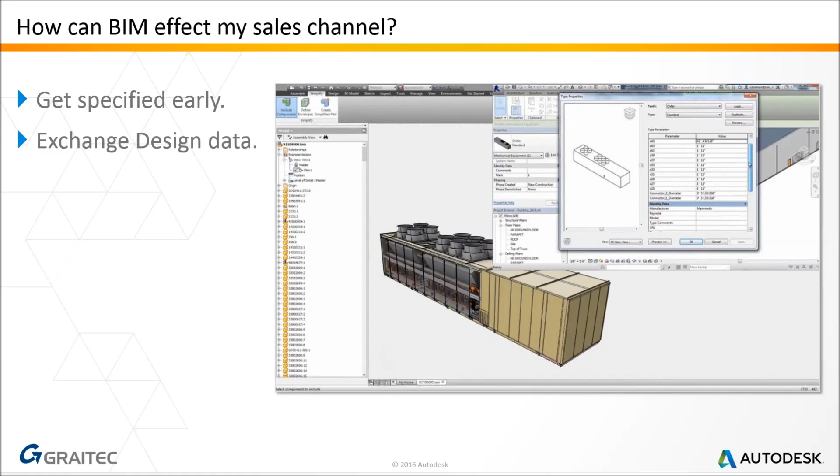Maybe we're using a mechanical CAD system, in this case I've shown a screenshot of Inventor, and we want to include our stuff. We want to be able to produce a model that can be consumed in the BIM. So this is another stage where we could get involved by essentially doing a data drop of our design at any given point. I think we would probably still deliver drawings with this, because drawings are still our contract documents currently, but we're producing some data-rich 3D model that can be shared, used for coordination, used for clash detection, and used downstream to start scheduling out information. So that's one other touch point where we can get involved in BIM.

The next one is for those people who sit somewhere in between. So maybe you do have a product, but maybe you offer some bespoking. Maybe you offer a design but in a couple of different colors, or maybe there's a couple of different configurations that you can offer your customer.

So this, I've got a screenshot here of a solution called Autodesk Configurator 360, and what this allows us to do is take an Inventor model that we've built as a configurator. Maybe we'd use some iParts and iAssemblies, maybe we'd use some iLogic, and all that stuff can be bundled up, wrapped up, and pushed up into the cloud to Autodesk Configurator 360, and this can be embedded in your own website. It can even be your own branding, so you don't have to see the Autodesk branding.

But then your customer can come along, and I'll indicate with my mouse here, they have a little control they can click on. They can click on this control and use the configurator you've built in, going through to pick and choose all the different options they could have. And then when they're done, they can either click on a button to go to a quote from you, so they email you directly and you get a list saying with this configuration, how much would it cost? Or they can download a file, and you get to choose which file formats are available.

In this case I've indicated a Revit family file and an IFC file, which we'll talk about later. But they can download a file if you would let them. You could also give this to your sales team as a tool, so they can walk the customer through the configurations, and then when they're done they can produce a quote. So this is really for more complex items where you couldn't build all that intelligence into one CAD file, and you want to offer your customer some choice.

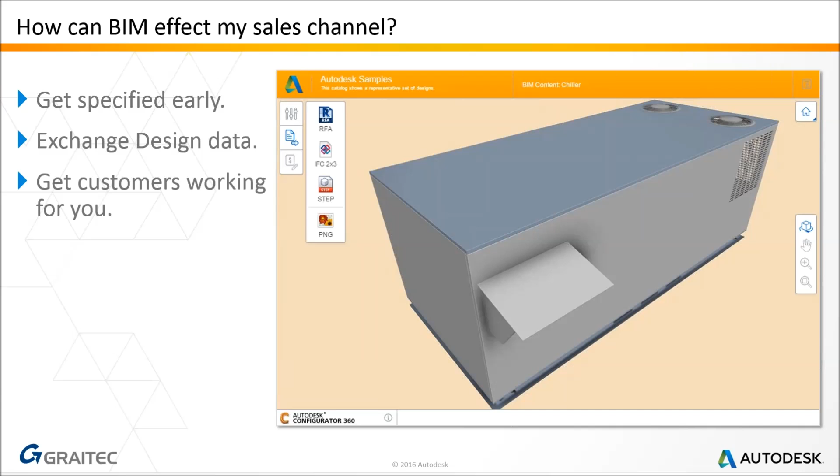Okay, so there's 3 different touch points where you could get involved in BIM. The last one was actually a bit of a surprise to me until I started going out there and talking to customers, but this is in the final stages. Many customers are now saying that they would like to have the BIM and use that as the beginning of their facilities management service.

So really what we're seeing here is perhaps us moving away from an O&M, which is fantastic because nobody likes producing operations and maintenance manuals. We quite often leave it to the last minute and print off a whole ton of drawings, box them up and put them in a big van, and we know they all go down into the basement and nobody ever uses them. So by having the BIM, the building information model, the customer has a big old database of the 3D model they can then analyse and use at the beginning of their facilities management.

Now for some companies, the maintenance contracts, being in touch with the customer—so if the customer wants something repaired or replaced or maintained—is a really important part of their business. And in fact some companies would rather have that business than the original supply.

They're willing to supply at cost if they can get the maintenance contract. So by the customer having access to your details directly, it means they can find you, and they can come back to you and ask questions. We can also provide a data link to that O&M, so the customer can link through with a hyperlink. They can come back to your website and look for a PDF, which could give them the cost data or maintenance information, whatever you need them to have. So instead of us having to supply loads of stuff on paper or spend time compiling PDFs, we can keep that link live and keep that information directly with them.

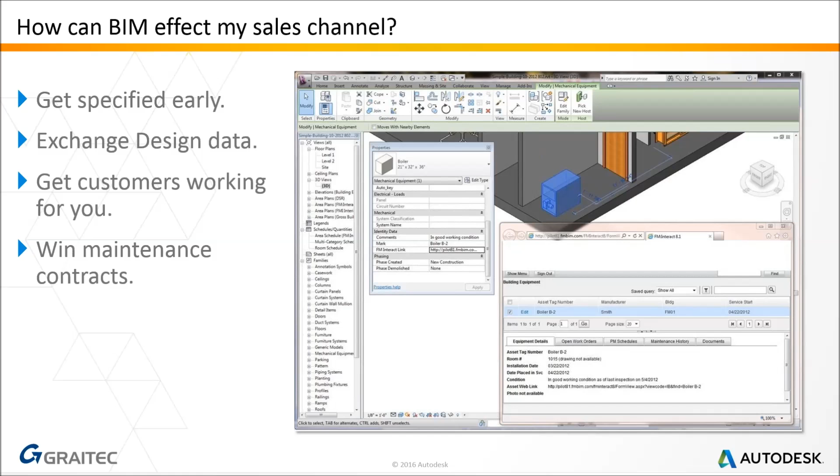So I hope you'll see yourself in one of those four categories, or maybe a couple of them. I wanted to throw that in right at the beginning - why is it useful, how can it affect my sales channel. But let's take a step back now and ask what exactly is BIM.

We've been doing something very similar to this in manufacturing for a long time. We've been taking a 3D model and using it to provide a database of information about our product - using it to compile a bill of materials, and the bill of materials is our data. In construction, this idea has now been called building information modeling, and it's really exactly the same idea: taking a 3D model and using it as a database of information about our building project.

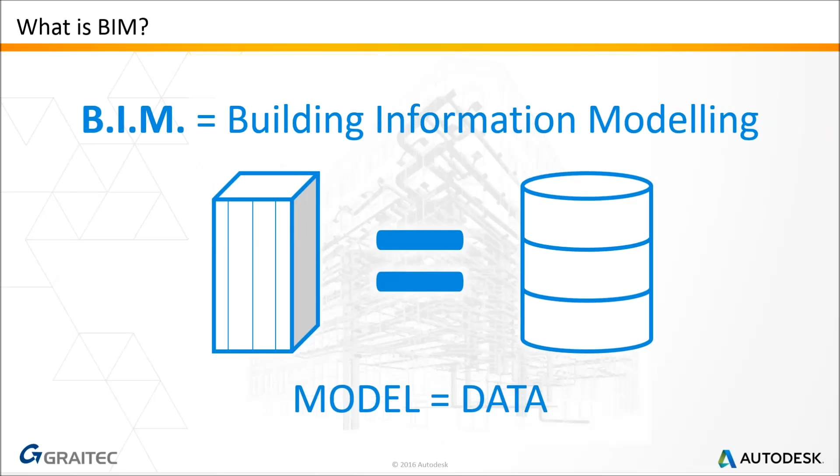Now there's one key difference between BIM and manufacturing - it's one of my favourite quotes. Let me just see if I can get this right: manufacturing is designing one part and making a million of them, whereas construction is designing one building comprised of a million parts. So although we've got a similar idea of creating this 3D database of information, there are some fundamental differences to the way you would design and specify a building versus the way you design and specify something in mechanical design.

In manufacturing, the efficiency has got more and more efficient over the years, because customers have had a market where they can come and say, listen, if you don't give me this product a bit cheaper, I'm going to go to your competitor. So there's this real incentive in manufacturing to become lean, to get into this black belt and Six Sigma and all this kind of stuff, where we can try and produce the same product for less money in order to retain our profit margin. There's been a huge drive since the Second World War in manufacturing to try and become more efficient, try and become leaner.

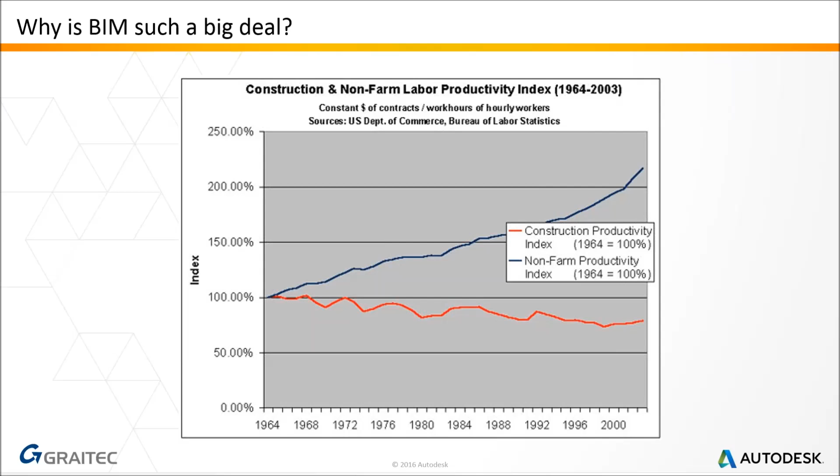So if construction is becoming less productive, costing the customer more, what do we do about that? Well, the biggest customer in the UK is the British government, and they were looking at their own construction projects. They recognized that construction project costs were going up, and asked what can we do about that. They put together a report with a company called McGraw-Hill, and one of the key findings we're going to talk about was the use of BIM.

This government report identified there was a 20% reduction in waste due to the use of BIM. Now 20% is huge, and I just want to clarify, this isn't a reduction in waste as in bin bags full of rubbish on site - this is waste as in a waste of time. So it's a 20% increase in productivity, if you like, a reduction in wasted effort.

So the wasted effort came from things like decision making. With BIM, working in 3D, you have to make those decisions early. You can't fudge things like you do in 2D and think, well, I'll work it out later. You've really got to make those decisions, and in business, pulling decisions forward usually makes sense. Even if later we think perhaps that was the wrong decision, making a decision is usually better than sitting and waiting. Because the longer you wait, the more expensive your options get, and you have fewer options because they become too expensive or can't be done in time. So waiting is never a good strategy.

So BIM forces us to make decisions earlier, but it gives us better information to make those decisions with. So really the 20% reduction is a 20% reduction in rework, in stuff getting to site and not working, not fitting, or not being correct to the specification. We get to site and have to take it down and do it again, and we all want to avoid that.

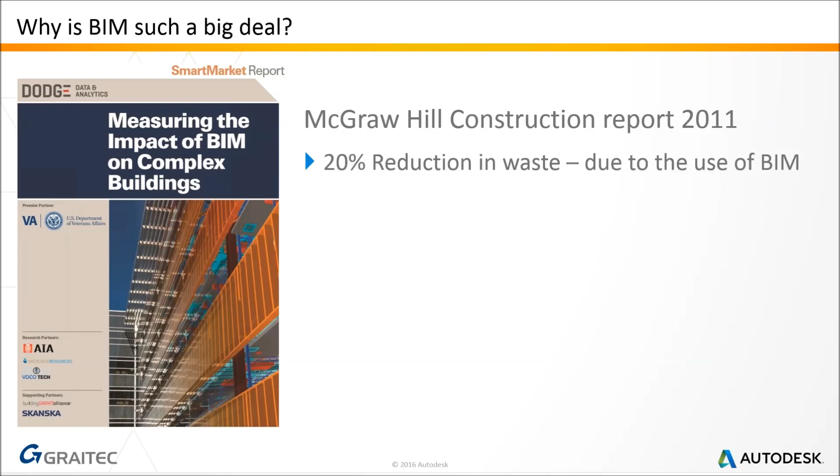So really all of these can be achieved with BIM. We can reduce waste and lower costs. We can have faster delivery because we can make decisions quicker based on better information. Lowering emissions is really about being able to do early stage analysis of our building information model, so we can look at things like sun studies and work out the heating, ventilation, and air conditioning load. We should have good accuracy, so when we actually produce the building we can compare that with the original results and ask, does this actually perform the way it was designed? That's something we're really interested in at the moment, because we care about the TOTEX, the total expenditure, not just the capital expenditure of the building, and not just the running cost, but the total cost.

So these goals might be lofty. We may or may not agree they're achievable, but you have to have goals to encourage everybody and set it all going. What's key here is that the government hasn't put this into legislation. They haven't said you've all got to do BIM, creating bureaucracy where we pay money to comply but don't actually change our behaviour.

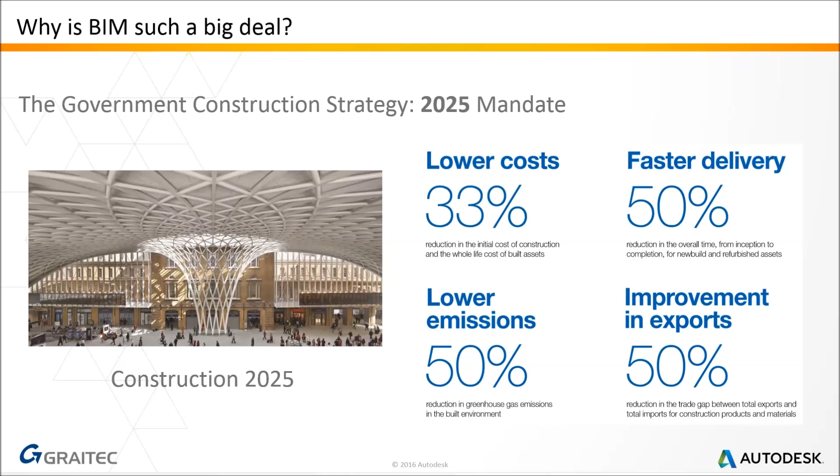What they've said is, as the biggest customer in the UK, we want BIM, and we know that's going to filter down to other industries and contractors. So the tier 1 contractors will get involved, and then they'll implement BIM on their other projects too. The tier 1 contractors will employ contractors who can support them in BIM, and those contractors will employ suppliers and manufacturers who can support them in BIM. So I think it's a nice way of going about it - not too heavy-handed. It's leading the way rather than just telling people what to do.

So this is all rolled up in the government construction strategy, a document you can read, and a couple of key points I want to highlight. The Cabinet Office will coordinate the government's drive to develop standards, enabling all members of the supply chain to work collaboratively through BIM. So it's right there in their documents saying they want BIM. The government will require a fully collaborative 3D BIM - a 3D building information model with all project and asset information, documentation and data being electronic. So no more paper. You may still submit drawings, but they'd be electronic, maybe in PDF format, but not paper.

And when we say all project and asset information, the 3D BIM, the building information model, can also be compiled against your project schedule, so you can see the way your BIM operates over time. We'll talk a bit more about that later.

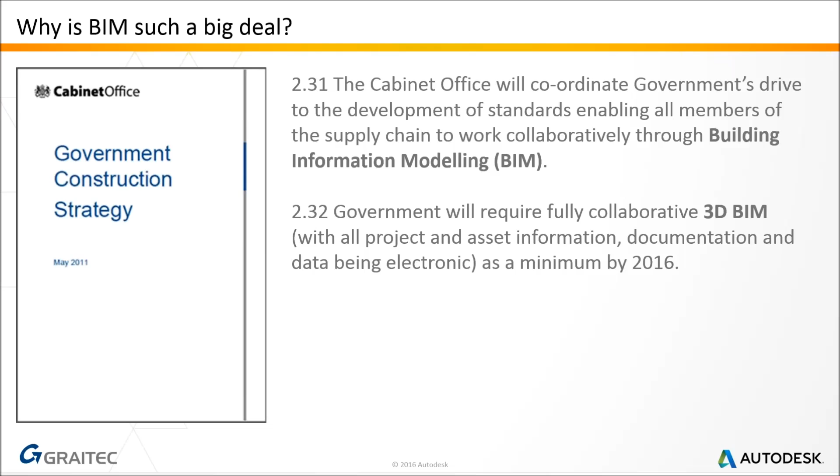Okay, so this is where the government are, not where they're going, this is where they are, as a minimum by 2016. The date was actually April the 4th, 2016. So if you're working on government projects that are starting after April the 4th, 2016, you will be required to produce a BIM deliverable. It's done now, we're doing it, we're getting on with it.

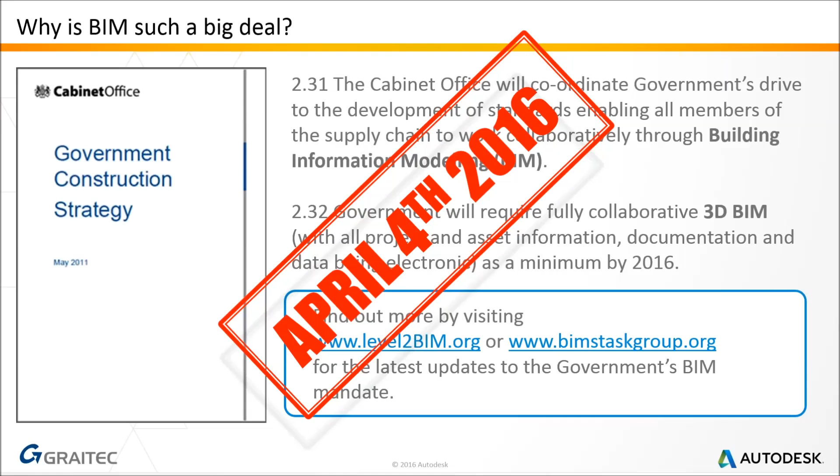So if you'd like to find out more, you can visit level2bim.org or bimstaskgroup.org. Level2bim.org is the government site, so that's where they'll put their latest updates. The BIM Task Group is a committee made up of individuals from government and from industry, specialists in many different subjects who've come together to try and work out how the delivery of this should work, so the standards and all that kind of thing.

So these are two websites which I encourage you to go and take a look at, maybe bookmark. You can either write them down, you can take a screenshot, or if you miss them, email me and I'll send you a couple of links.

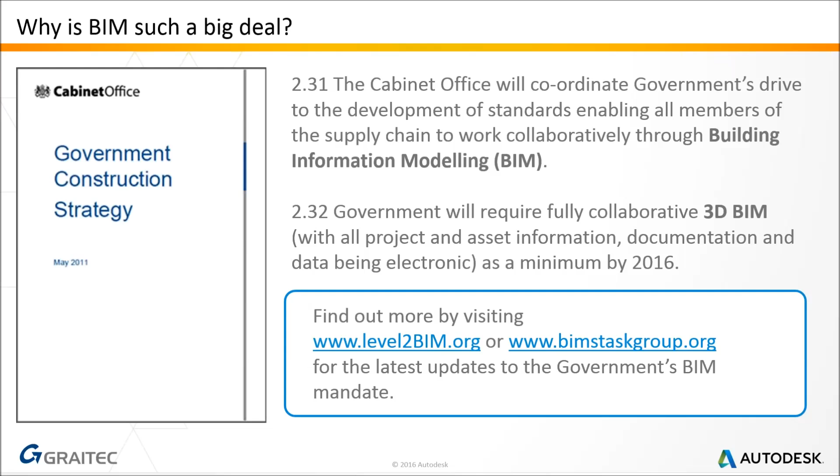Now, CAD itself has had a huge effect on the construction industry. It's really changed the way we've worked, principally because electronic drawings, 2D CAD drawings, you can email. And that's changed how we work, because we can work with people who are further apart than we used to, and we can swap information quicker. So the speed at which we can share information has really changed the way we work.

I would say, though, it hasn't necessarily improved the quality. I think you'll all be familiar with working through a project where you're changing things so quickly that things change before you even finish the last set of changes, and you feel like you're in this endless cycle of just changing and reissuing. So there's some really good points about CAD and some less convenient ones.

And you could think of CAD as being slight chaos. There aren't that many standards. People aren't really aware of what the standards are, so each company is kind of doing things in their own way. So although we do have electronic data, it makes it quite difficult to use it for the purposes of comparing each individual subcontractor's designs and making sure everything's going to work. So it's useful, but can be frustrating at the same time.

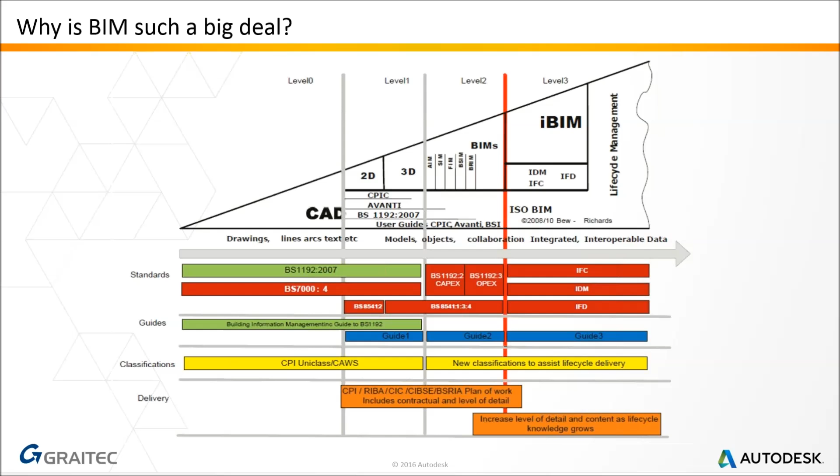Anyway, down the bottom, just to point out some of these things that are going on here. So towards the left hand end we've got BS 1192:2007 as the standard. That was the construction industry standard for the exchange of data when we were dealing with mainly 2D CAD. As we can see, at the cross between level 1 and level 2, this turns into something called BS 1192. BS 1192 hasn't been released yet. It's currently a PAS 1192. We'll talk about that a bit more later. But essentially it's been rewritten for BIM. So this is going to be our main compliance document for the exchange of BIM data.

Okay, so how can we take part in BIM? So hopefully you've got a good understanding of what BIM is now and why it's around. How do we take part? Okay, so I just mentioned it then, PAS 1192. PAS stands for Publicly Available Specification. So what that means is it's not actually become a British standard yet, hasn't been ratified as a British standard, but it's currently in the process of being written and it's publicly accessible. Right?

So this is now your opportunity to get hold of a copy and you can add your own feedback to that if you wish, and it's a good time to get hold of it because PAS is a lot cheaper than BS is. And I should also point out that PAS 1192 is not the complete standard, so it does point you as a reference to other standards.

So there are plenty of standards that are there to document each area of BIM and the exchange process. So BS 1192 was mainly 2D and 3D CAD. PAS 1192 will be BIM.

Okay, now I'm going to go through a whole bunch of different documents and phrases and things you should know about BIM, and this is really about having the language of BIM, so that when people talk to us about BIM, they phone us about it and want to know what's going on, or they want to come to us for a tender, that we understand and we can use the right language. So what else have we got here?

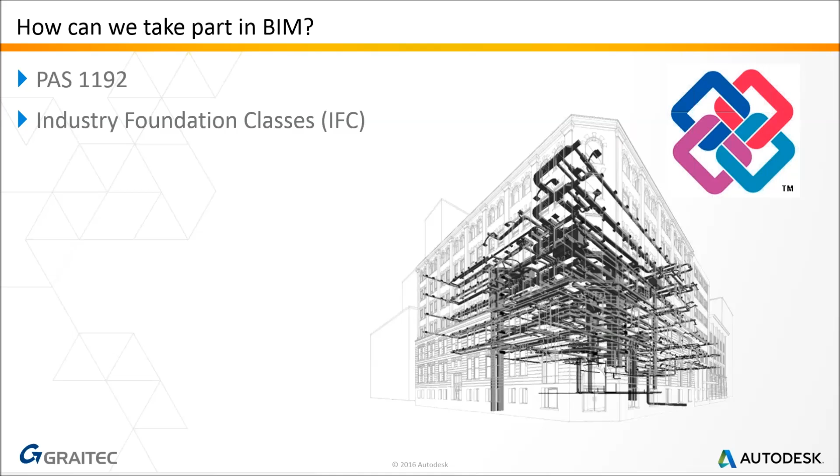So after IFC we have COBie, Construction Operations Building Information Exchange. Okay, so COBie is another thing you'll need to remember, need to be able to talk about with confidence. COBie could really be thought of as the data without the model. So we've talked about the fact that the customer at the end may well want this big data-rich 3D model with all this information in it, but some customers don't have the ability to access that 3D model and don't wish to. They just want the data.

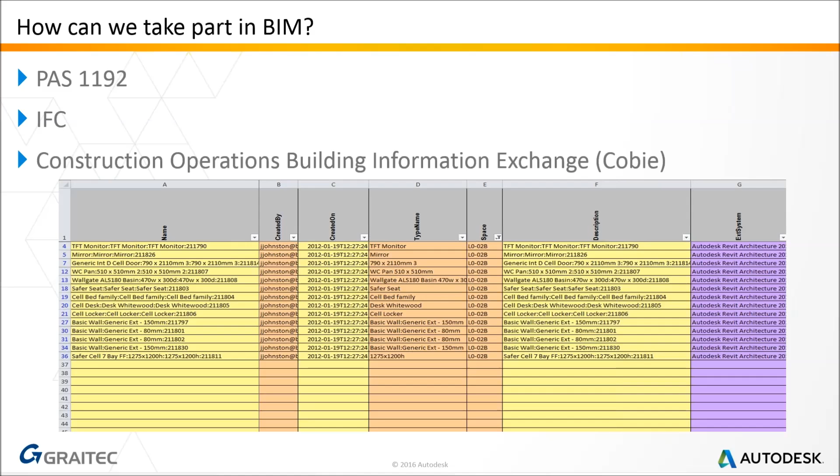They want the data out of the completed model so that they can fill their database with information. So COBie is the data export, and in this case I've shown you an Excel spreadsheet, but it could easily go straight out to a Microsoft Access database or something like that. So if you get asked for COBie data, I hope you'll now have an idea of what COBie data is.

EIRs, Employer's Information Requirements. So this is the form which the customer would fill out so they can issue it out to whichever parties are working on the project. So it'd probably be the main contractor, the QS or project manager, any sort of consultant engineers. This is where the employer would specify that they would like a BIM as a deliverable. Okay, so unless you're a tier 1 contractor, you probably wouldn't see this form.

But I can tell you that you will see some of the information in it that will make its way down to you. So if you can find this Employer's Information Requirements form, it might be worth you having a look at it, particularly if you're in estimating and sales. These are the kind of bits of information which you'll be asked for, which will come down to you, and it's probably worth you knowing what's going on with that and understanding it.

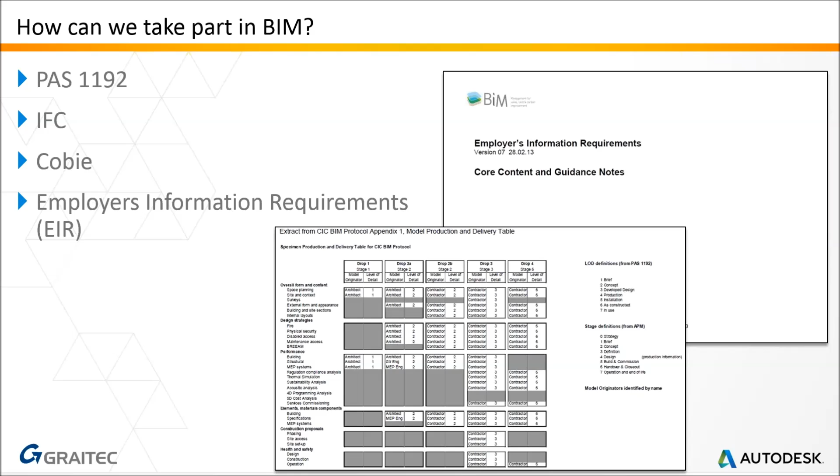The customer may specify BIM, but they might not specify exactly how we're going to do it. They'll just specify the deliverable. So they might say we'd like an IFC model with a COBie database, or they might say we don't care how you do BIM, but we want the native files when you're finished, whichever BIM product you're using to generate them.

Okay, next one. Construction Project Information Exchange, or CPIx, Pre-Qualification Questionnaire. Again, this is one that you may or may not see directly, but you probably will find that you'll get questions coming from these forms which are just being copied and pasted out and put into a pre-qualification questionnaire for you. So again, it might be worth you looking for these forms, downloading them, taking a look at them, thinking of your answers, and then just put them in a document so that your sales or estimating team can just copy and paste rather than having to think about it every time.

It's useful if you can to answer in the positive. These things are scored, so that will help you get on the tender list if you can answer positively. But obviously, be honest. Don't say yes to anything you can't do. But try and be positive even if you can't do it. Okay, so that's another one. You might not see these directly, but you may find you get questions from these, so it's worth getting hold of them.

Next thing is BIM statement. So this is simply an executive summary of your BIM policy, which you could put on your company webpage. So this is usually written by one of your directors, and let me just give you a couple of ideas of what might be in it. So you could say why you're committed to BIM, why you think it's a good idea, why you're willing to invest in it, a brief idea of what you're capable of in terms of BIM, and where more information can be found.

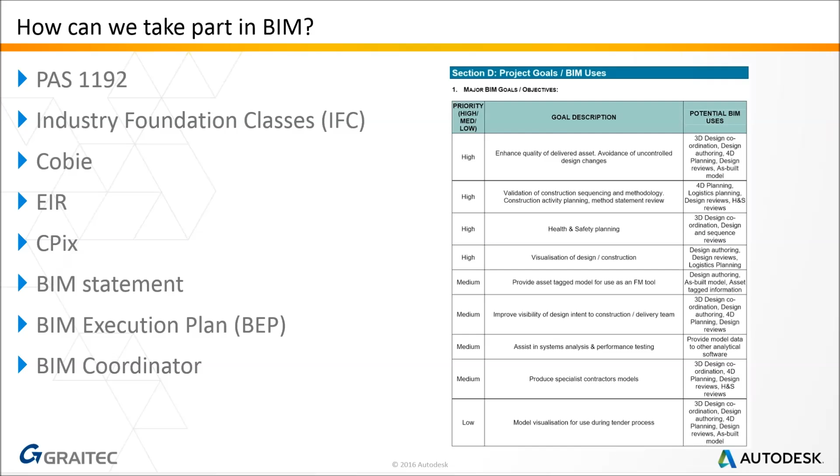Who is the BIM coordinator? He's the person I'm going to go to ask any questions. And he's the person who you go to if you wanted to do some test exports and just make sure everything's working.

So the last one to talk about in this section, common data environment. So you've maybe come across these before. Common data environment is usually a web portal where you can upload your documentation, and it just puts all the documentation in one place. So instead of emailing 5 different people with your documents and then all those people having to save their own copies, and then we don't know if we've got the correct copy, we don't know if it's up to date and all that kind of stuff.

We don't know who's had what and when. We can't prove that somebody's had a document. So if they say I never got it, you can't prove they've got it. Whereas web portals, we can upload all our stuff, everybody gets an alert to say there's new information, and we can track and see who's looked at it and who's downloaded it.

So we know the information on the web portal is always up to date, it's always the current release of information, and we can even do things like electronic markup on some of these portals, so that we can track the whole audit trail of drawings from when they're first issued to when they're approved and released. So Autodesk's common data environment is called Autodesk BIM 360 Docs.

So as a supplier, you probably won't need to maintain one of these yourself, but you probably will be invited to join them. So the question for you will be, do I have everybody in my drawing office trained to better use whichever project portal we've been asked to get involved with? Or do I have one person in my office who does all this and they know all the systems and my drafters just give them the information?

The nice thing about the Autodesk BIM 360 Docs platform is it not only manages our drawings, but it also manages our 3D models. So when you bring up your 3D models into the portal, you get a nice viewer. It splits the model out from the drawings, so you can supersede drawings individually. And it's cross-platform independent, so you can use it from your tablet, you can use it from your smartphone. So I hope you'll see this a lot more in future. It's a nice tool.

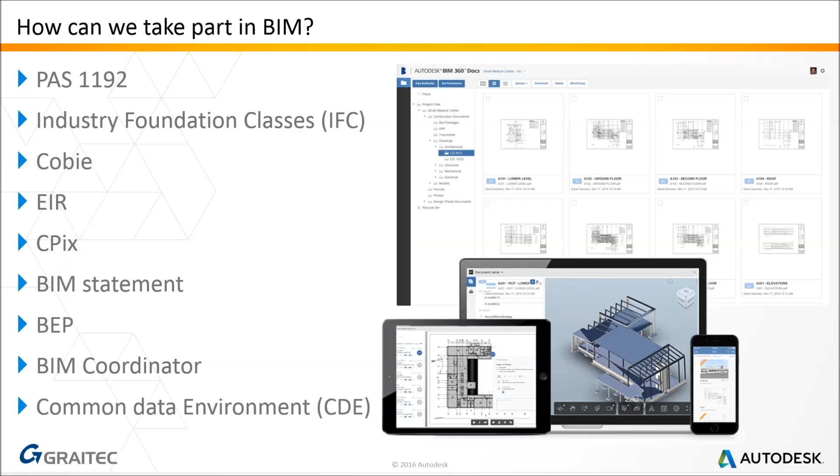Okay, so let's move on and talk about BIM content. So the tools we have for creating BIM content, one of the main tools is Revit. So Revit is Autodesk's BIM platform. It's the software we use for BIM. It's currently the most successful one in the UK, so it's the one that most people will be using. It's become kind of synonymous.

Revit isn't BIM software. Revit isn't BIM. BIM isn't Revit. But Revit is our tool for doing this, and I think it's got more than 50% market share. So we're doing really well with this product at the moment.

If you're producing proactive content, remember right at the beginning we said if you're a product supplier, you've got your product up there on shelves, you want to be able to produce some content, put it out there so people can download it and put it in their BIM products. If you're doing that kind of work, you probably want to create a native Revit file.

And the reason why you probably want a native Revit file is it's going to be a smaller, lighter file that's designed to be used in Revit. A Revit asset is called a family. So we include in one Revit family a number of different family types.

So you could offer one family that has different color options or different sizes, so your customer can download one file and then choose from the different types available.

So if you're being proactive and putting that content out there, you either want to get hold of Revit and do some Revit training to produce your content, or you want to commission somebody else to produce that content for you.

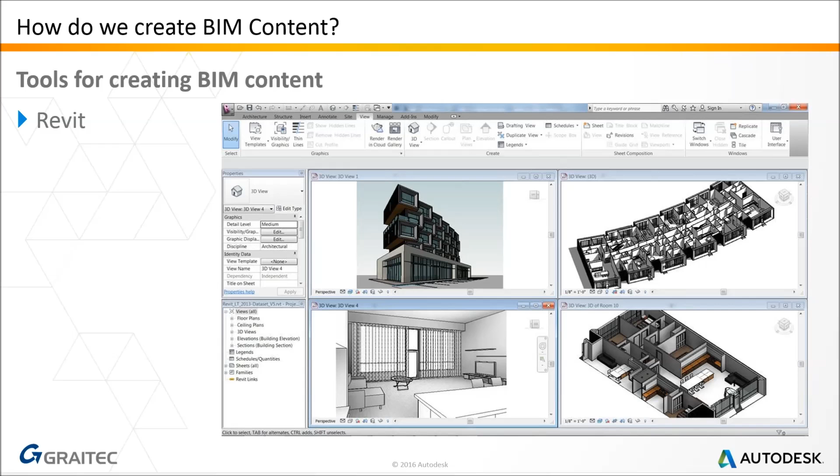That's certainly one approach. How about Inventor? So if you've got Inventor, you can repurpose your Inventor models for BIM. I think this really suits people who are supplying a service rather than a product. If you're designing something bespoke for that building, Inventor is a much more useful tool for manufacturing design, but you can still participate and provide that content in a Revit-based format, and we'll look at this later.

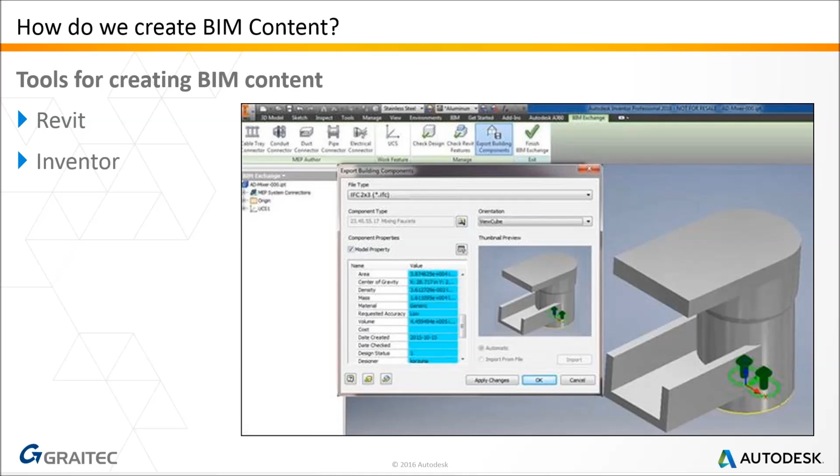I've got a little demo of how this works. We can export some stuff out of Inventor and import it into Revit. So Inventor is a great tool for producing that BIM content for those people doing that sort of service.

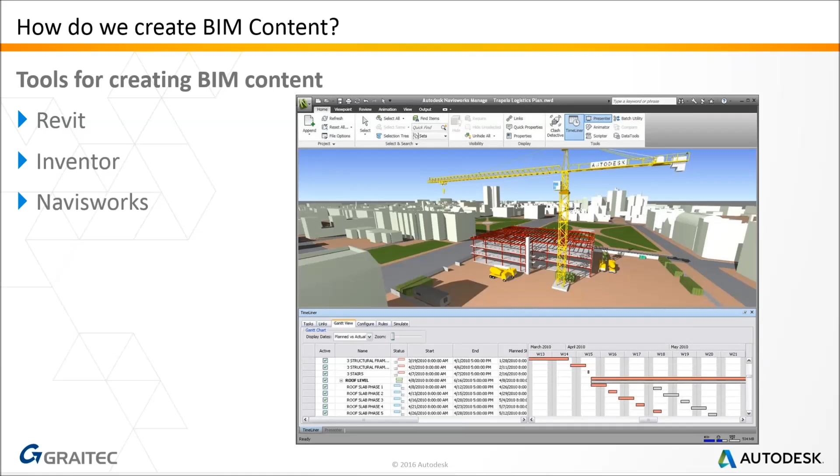We also have something called Navisworks. Navisworks is really a content aggregator for BIM. It isn't something you use for designing models, it's something you use for bringing them together. So you could bring in content from Revit, from AutoCAD, from Inventor. You can bring in data from, I think, around 50 different file formats, so it will really accept almost anything.

What you do is use it for compiling all the different models together to see whether they're all going to fit. And the really nice thing about Navisworks is also where we do our 4D BIM, as we mentioned earlier. So apart from bringing in the 3D models, we can also bring a Gantt chart in of our production schedule, or construction schedule, and pin the 3D model items to the schedule. As we animate the schedule and play through it, we begin to see an animation of the building as it is going to be built in 4D, in time.

So this is really helpful for things like temporary works. We can look at where temporary works are, we can look at things like loading, where can we offload materials, where's going to be a convenient point. So we can use it for project planning, and we can use it for planning things like the crane - when can we get the crane in and when can we get the crane back out again, making sure that we can get it out.

And so it's a really good content aggregation and planning tool, but you may be asked to supply Navisworks files as your deliverable. So what you do is take your Inventor model, open it up in Navisworks, save it, and then send that off to your customer who's written the BIM execution plan.

Okay, so a couple of different tools we've got from Autodesk for doing the work here for BIM. We used to get these in something called the Building Design Suite, and we'd get all of these tools in. Now we've moved to collections, and unfortunately we don't get Revit and Inventor in the same collection.

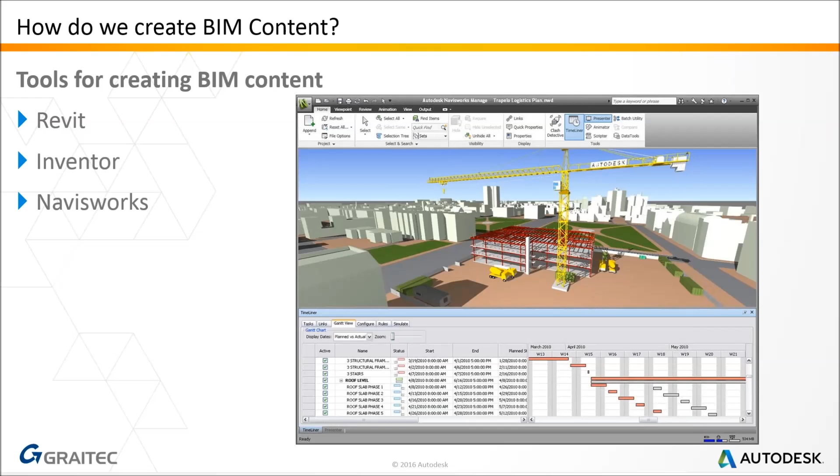Okay, so here's a couple of workflows. If you're a product supplier, original equipment manufacturer, then you probably want to produce parametric Revit families - families that can change in size with different types - and you probably want to work in Revit. That's probably the best deliverable for you in that situation.

If you're producing something that's entirely bespoke, so you don't have anything to begin with, you're just going to create something for that customer, then probably you want to work in Inventor, and you would either export out to Revit or Navisworks for the purposes of coordination.

And the final workflow is if you have a catalogue of items which the customer can alter slightly, then probably your best bet is to work in Inventor, build that configurator, then upload it to Configurator 360, and allow your customer to configure what they're after and download that Revit file for their project.

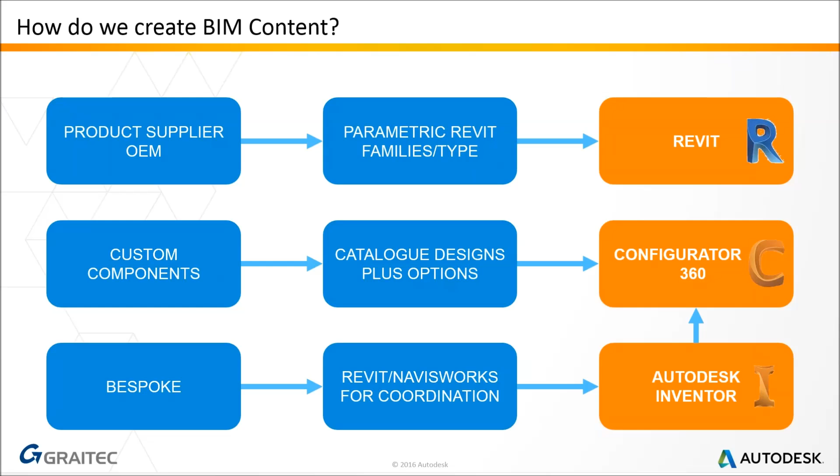So a few notes on preparation before we start. File formats - this is really important.

We talked about Revit family files, that's an RFA. If you're putting that content out there proactively for the customer to download, it will be Revit family files you're dealing with. If you're working on a project, your deliverable could well be an IFC, a neutral file format, or an NWD, a Navisworks file. This is when we open it in Navisworks, save it, and send it off for coordination.

A format for you to be aware of is the ADSK file format. This is really an interchange format - one of the formats we can export out of Inventor and import into Revit. But when we import into Revit, it's converted into a Revit family, so eventually we have that Revit family available to be shared with people. That's just a temporary exchange file format.

We also have DWG, which is AutoCAD, still being used. I won't deny it, we're still sharing DWG files with each other. And we've actually found when importing and exporting out of Revit, InfraWorks, Civil 3D, and Inventor, quite often the DWG gives us the best results, with all colours and data preserved. So it's still a very useful interchange file format.

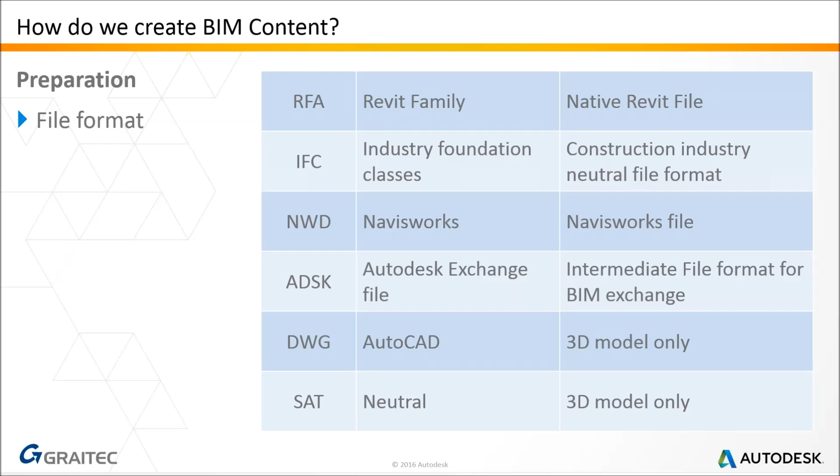We also have SAT files. SAT, like STEP, IGES and JT, is a neutral file format that can be accepted by Revit, but it's a 3D model only. So if we just want to use the 3D model data and add the additional product data in later, SAT may be the exchange file format we'll use. So when you're creating BIM content, have in mind which file formats you're going to deliver in.

We also need to think about release. If an architectural firm's got involved with a project, quite often these projects can be a couple of years in planning and then a few more years in execution - a construction project can take 5 years from beginning to end. So if the project was started in Revit 2014, they're probably not going to change products halfway through. They'll keep that project in the same file format, otherwise it becomes too difficult.

If you think about those aggregated models, everybody working on the project needs to be working on the same software, same release, in order to better bring together and compare them. So they're probably not going to change releases as they go through. And you may find that even though it's 2017, people aren't using the latest version of the software.

So if you're putting libraries of Revit family files out there, you might want to think about which version of Revit you use. If you supply them in a 2017 file format, Revit is not backwards compatible, so customers still using Revit 2014 won't be able to open those files. Your best bet is probably to issue them as Revit 2014 files, and then any customer using Revit can open those files.

If you're producing your content as a bespoke service, providing content through the construction phase of the project, this should be in your BIM execution plan - they should tell you which version. So if they're saying they'd like a deliverable of a Revit file to bring into Revit and do clash detection and make sure everything's coordinated, they should tell you which version of Revit they're using. And if they don't, you need to ask and make sure you understand.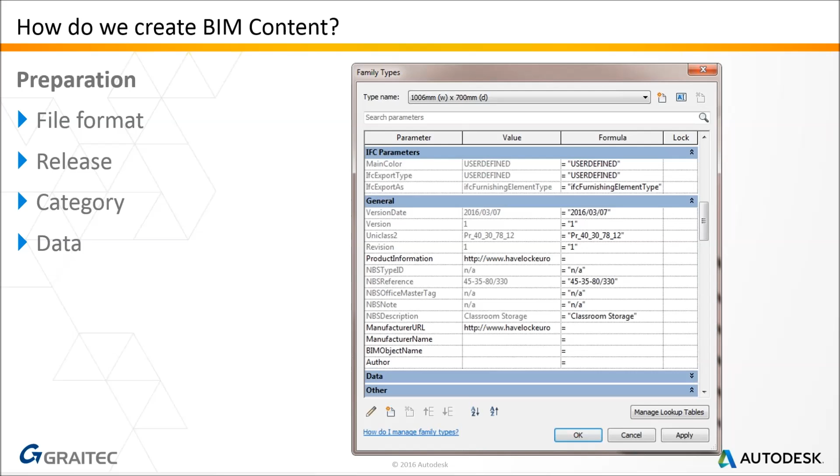If you're working on a project, again you're providing a service, once again you should be looking at the BIM execution plan: what data am I required to supply with this product? And I want to make sure that data is all correct.

Here's another subject to talk about: level of detail. So in manufacturing, we want everything at a detail of 1:1. We're literally building a digital prototype of the thing we're going to manufacture. The more data we can put into that model, the closer it is to real life, the more useful it is to us. So we always think of our 3D model being an exact replication of what it's going to be in real life. In construction, we kind of don't have that luxury.

Remember, we're building a building of 1 million parts - this is going to be a big model. There's no way we can include every nut, bolt, fixing and every little tiny detail. So BIM software generally will model to a much lower level of detail than we do in manufacturing. So this is a good question to ask: how much detail do you need? Essentially you'll usually be given a guide, like, don't show me any feature that's less than 10 millimeters in size, or maybe 25 millimeters in size. But they'll give you a clue.

In Revit we have an opportunity to build a number of different levels of detail into the same item. So we can build a 2D level of detail, we can have a very blocky conceptual level of detail, then a more defined level of detail, all within one file. When we're exporting out of Inventor, I'll show you how you can thin it down a little bit, but essentially we just have one level of detail, so it's worth knowing what you're trying to hit.

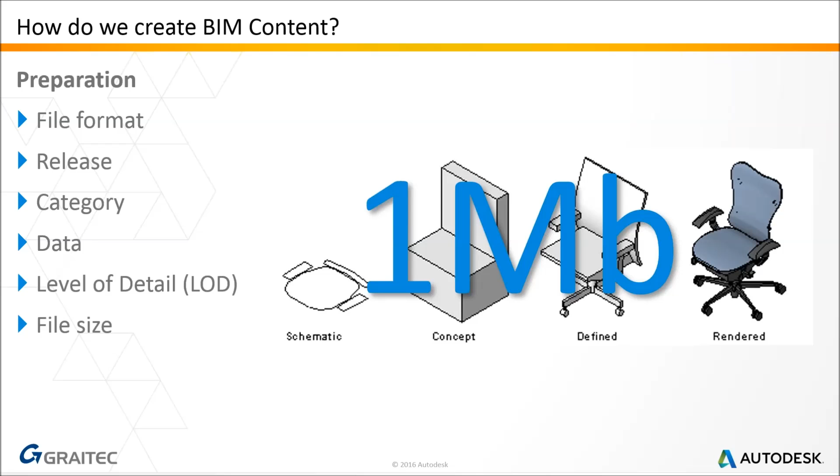Another guide could be file size. Rule of thumb, if your model can be about 1 megabyte on disk, you can be pretty confident that's a good size. And again, this is because you may be using that model a number of times within the BIM. So if you're designing something like a reception desk where you're probably going to have one of them, and your reception desk export was a bit bigger than 1 megabyte, I wouldn't worry about it too much. But if you're producing something like this chair, and you've produced a chair model that's more than a megabyte, you probably don't want that. You probably need to do a little bit of extra work.

So these content distribution systems are really helpful. You're not charged as a user. So if I'm an architect and I go on one of these sites looking for a chair, I'm not charged. The product manufacturer, once their stuff is hosted, is charged. And so part of the service that people like BIM Store and NBS offer is promoting your content, getting it out there, helping you get it specified. And they can also give you reports of who's visited the site, who's looked for your stuff, who downloaded it, so you can approach those customers directly. So that's one way to go about it.

The other way to go about it is to self-host. So you put the information on your own website. It's a little bit cheaper to do, although you will still need a website, a server, and probably some sort of developer to help you put the information up there. But you have a little bit more control over who can use your content. So you could put it behind a firewall where people have to give you an email address before they can download the content, and that should allow you to filter slightly who's actually using it. But again, it's leads for your sales team. Your sales team is able to say, we've had some people download our content, let's give them a call and see if there's anything else we can help them with.

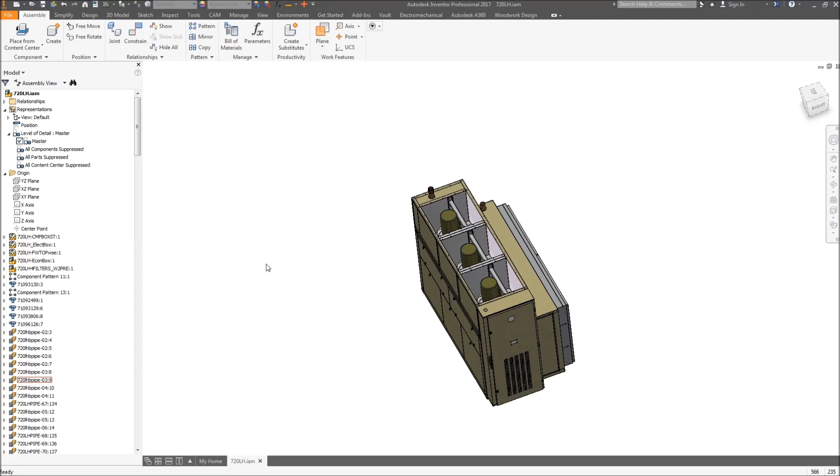Okay, so who's ready for a demo? Let's just flick over to this unit. So this is an air handling unit that I have in Inventor. We're going to look at a couple of workflows for repurposing our content from Inventor out to Revit. So we're going to imagine that we've been contracted to design this air handling unit, and we've finished our model. We have our complete model in Inventor. So this is everything we need to know to manufacture this unit. If I just open up here my bill of materials. So my bill of materials is my database view inside Inventor.

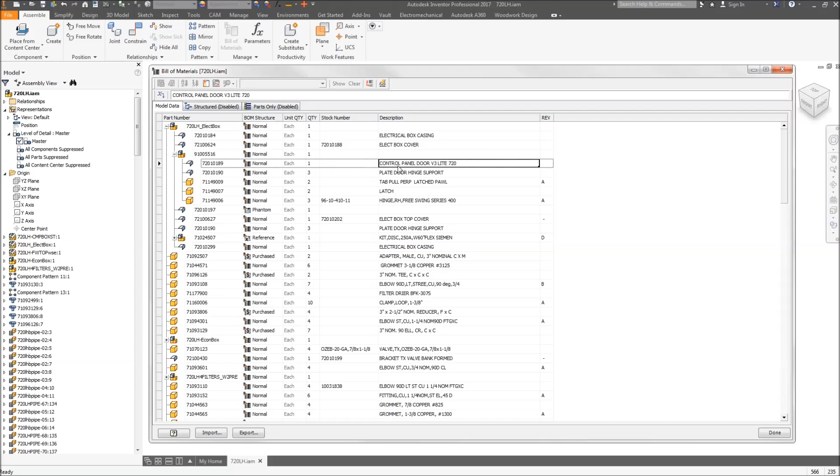So in Inventor I have this BOM, and in my BOM I have a full listing of all my components. This would allow me then to be able to manufacture or procure all the components that I need to be able to create this item. Okay, so this is 100% detailed, it's as accurate as I can make it, it's as close to real life as I can make it.

Now if I wanted to export this out, so the architect has asked me to provide a model of this that he can use inside Revit, so he can use this for some coordination work. No problem at all. I'm just going to come up here to my Environments tab, and in my environments I have my BIM Exchange tools.

So I'll just click straight on there, and the first thing I can do in my BIM Exchange environment is I can check and see kind of how big my model is. So what's going to happen when I exchange this? So the tool I'm going to use up here is called Check Design. So I'll click there right to begin with, and Check Design brings me up a report. I'll just scoot this over from my other screen.

So my report is saying this has a model complexity which is high, and I have 566 occurrences. That's 566 occurrences that the part files have been loaded, and I have nearly 20,000 faces, or 19,000 faces in there. Okay, so this is giving me an idea.

This is a pretty complex model, and I could export this directly out exactly as it is, and it could just be then brought into Revit, and it could be used for coordination. But they probably wouldn't thank me for that, because they probably don't want that much detail, and they probably don't want a model of that size. So let's see what we can do to clean this up a little bit.

So I'm just going to click on my Finish BIM Exchange icon, and before I even start, I'm going to use a shrink wrap level of detail just to thin this down. So if you're not aware of how Inventor works, down the bottom right hand side here, here's our occurrences. So we have 566 occurrences, 235 files. So we have 235 unique part files, and some of them being used more than once. That's why we have 566 occurrences.

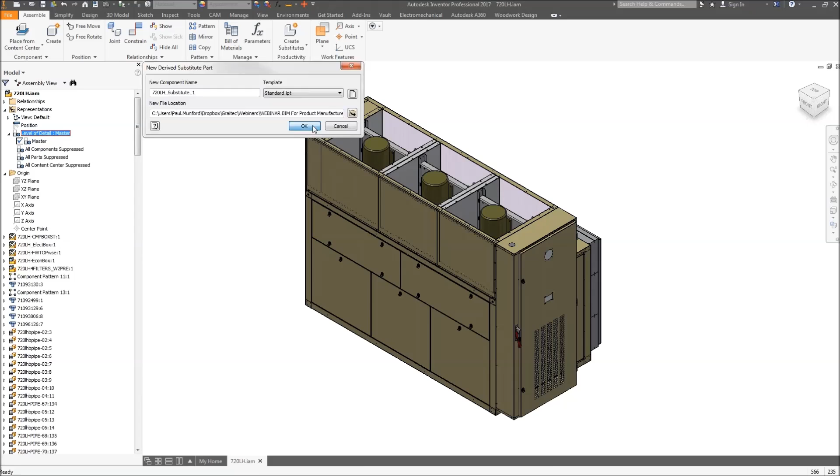So what you should see straight away is Inventor is opening a part file, and inside our part file it's going to create a reference to the assembly, and it's going to derive in all my individual parts as bodies. So I can choose here, firstly to begin with, do I have a single composite feature? So that's just going to be surfaces. Or do I choose to maintain each part as a separate solid? So that's going to be still pretty sort of high weight.

I could choose whether to have solid bodies but keeping seams between faces. So this is useful if you, for example, split a face so you can show a different colour on a different section of the face. You'd want to click this one if you want to preserve that. But I'm going to go right here and choose a single solid body merging out seams. So this is giving me a solid body rather than a surface, but it's the lightest weight option for my solid bodies option.

Now, I have a couple of different options down here to simplify this using algorithms. So remove geometry by visibility. So what that's going to say is if I can't see it, should I remove it? And the percentage here is a percentage of the total size of the part of the assembly file. So if everything in assembly is 100%, so if I put that to 100%, everything would disappear. But I'm going to put this to about 15%.

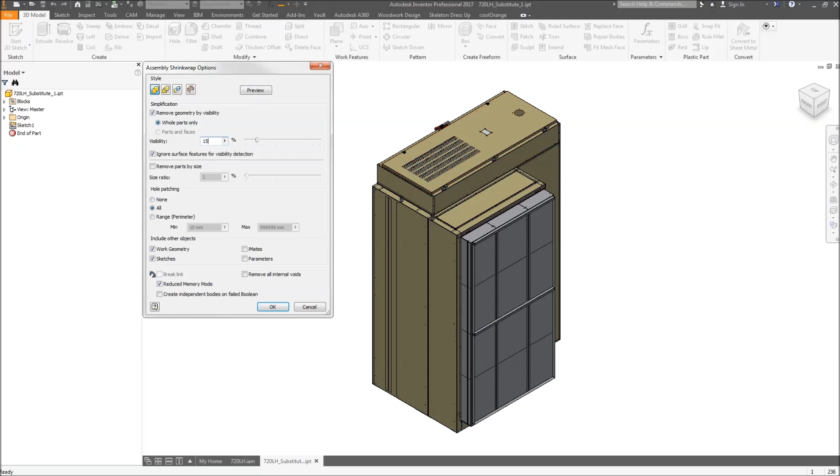And what I'll do then is I'll need to click on preview to see how the changes have affected this assembly. So if I just scoot this around a little bit so we can kind of see what's going on with it. Okay, and then I'll click on preview. And it's going to run this algorithm and it's going to build us this derived part. So we derived in our assembly. And you can see there how it's removed some of those components. Okay? So we can choose to simplify by removing components that are invisible.

We can also remove components by size. So this one I'm going to set at about 5%. Now, this is an algorithm based on the total size of the assembly. So if this assembly was twice the size or contained twice as many components, the percentage here that I put in, 5%, it may not be the same every time. So you will need to go through this process a couple of times, just choosing some ratios, hitting preview, and then seeing what you get in your preview and thinking, is that appropriate, is that okay? Has Inventor taken away some details that I actually wanted?

Okay, so I think it has actually. I'm going to set this to 3 and run it again. I've just missed a bent pipe over there that I would like to keep in. So I'll do my preview again. I'll see what happens this time. Okay, that's a bit better. I'm going to keep that.

Now the other thing I can do is I can turn on hole patching. This is currently set to all, but I'm going to put in here a range. Now when this says holes, it doesn't mean circular features. Okay, it could mean any pocket, any indent into the component. So I'm going to set this to a range of 350 millimeters. So 350 millimeters is the perimeter. Yeah, so that's the biggest perimeter. And then I'll hit preview in a moment, but just to begin with, I'll untick work geometry and sketches. I don't need to include those. I am going to tick this option here, remove all internal voids.

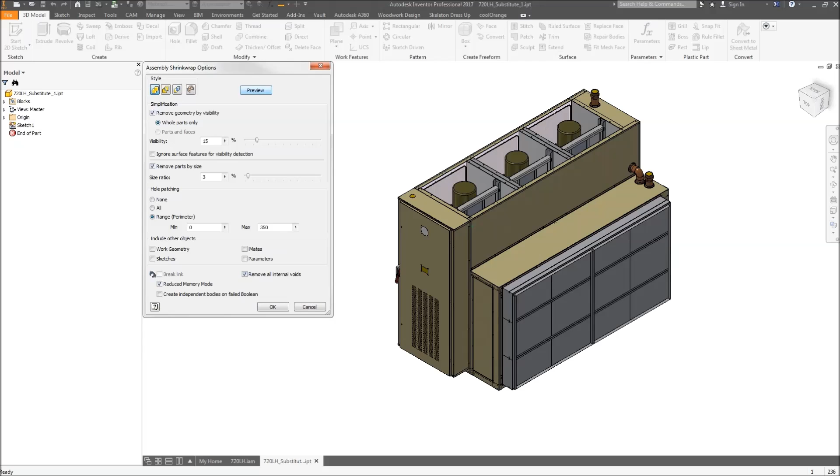Okay, so again we get a preview up there of what it's got, what it hasn't got. It's patched some holes, it's filled internal voids where it can, it's removed some features. So I'm happy with that. I'm going to click OK. So what Inventor will do now is it'll take this part file we've created, containing this derived reference to our assembly, and it's going to put us back into the assembly.

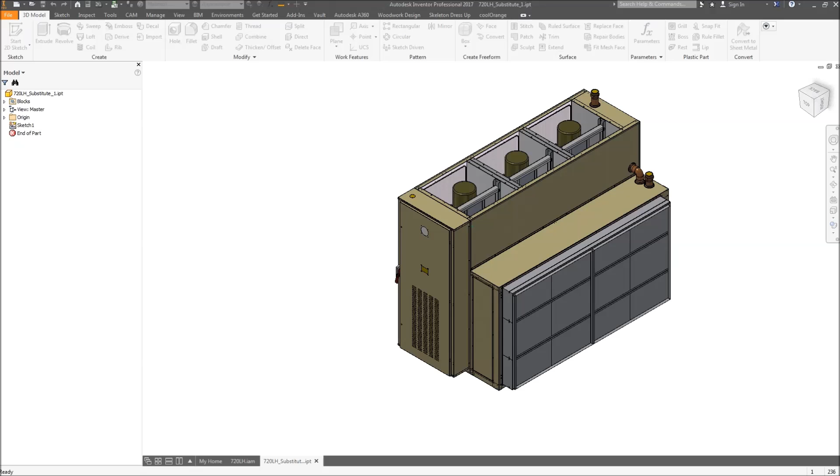And in the assembly we should see that we have replaced all those 566 occurrences with just one occurrence of one file. And it's that file that we can then export out to Revit, and we should have something much simpler. So here we have our substitute component, and here we have our substitute level of detail. So maybe I'll just rename that export to BIM.

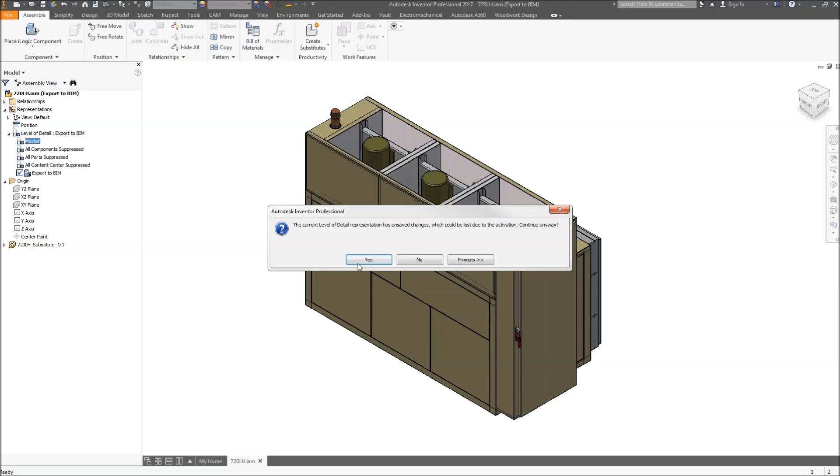And what's absolutely key to understand here is if I double click back on my master level of detail, it's going to load all those components back in again. So we'll see in a moment, there we go, our full assembly with all components, and then double click on export to BIM to swap all those components out with our reference to our derived part file. So what we can do here is we can continue to work on our design.

We could continue to add stuff to our main assembly. We can add detail, we can add components, and when we're ready we trigger that export to BIM, we update the substitute component, and we're there again. So it's part of our workflow. It's not something we can only do when we're finished. We can actually set this up quite early on in the project and then just update that algorithm continuously as we go through the project just to make sure it's up to date before we export.

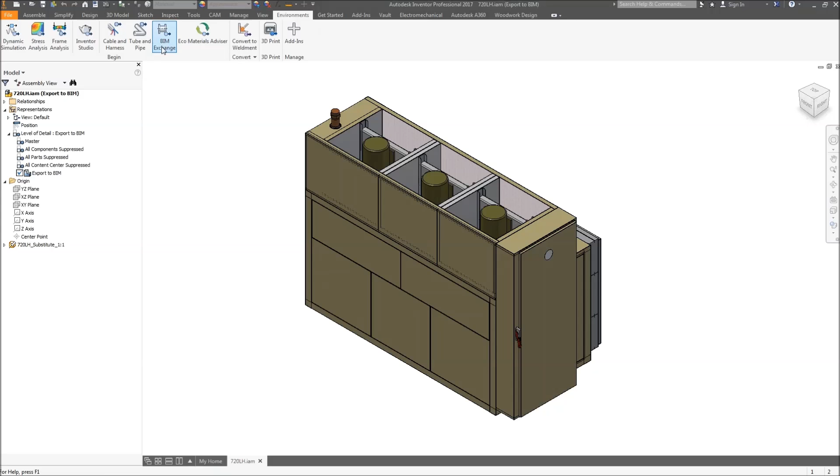Fantastic. So let's take a look now. We'll come back up to Environments tab. We'll go back to our BIM Exchange. We'll click on our Check Design and see what sort of result we've got. Okay, this is pretty good. So we've still got a highly complex model, but instead of 566 occurrences, we've just got one. Instead of those 19,000 faces, we've got 4,000. So that's pretty good. That's really going to help. So it's definitely worth doing a shrink wrap before you export anything out to Revit.

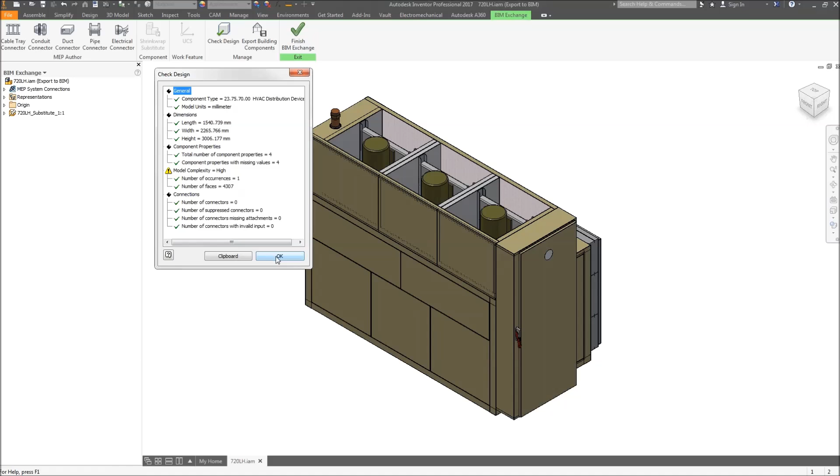But we can continue to do work on this to make it even smaller. So let me just show you some of the tools we've got there. So what I'm going to do is I'm going to open up this substitute file directly. So I'm going to right click and choose Open. Okay, so now we're working directly inside this part file. Okay, so this is our substitute part file. This is our derived reference. And if I right click here, I can choose Edit Derived Assembly. And you should see here we get the same options back up again that we had before.

So again, this is another important point. Once we've run that algorithm to create our shrink wrap component, we don't have to run it again and create a new shrink wrap every time. We can edit the existing one. So if we didn't like those settings we chose, we can always go back, we can always edit it. It's like anything in Inventor, you can always go back and edit. You don't have to delete and start again. So let's just wait a second for this dialog to pop up.

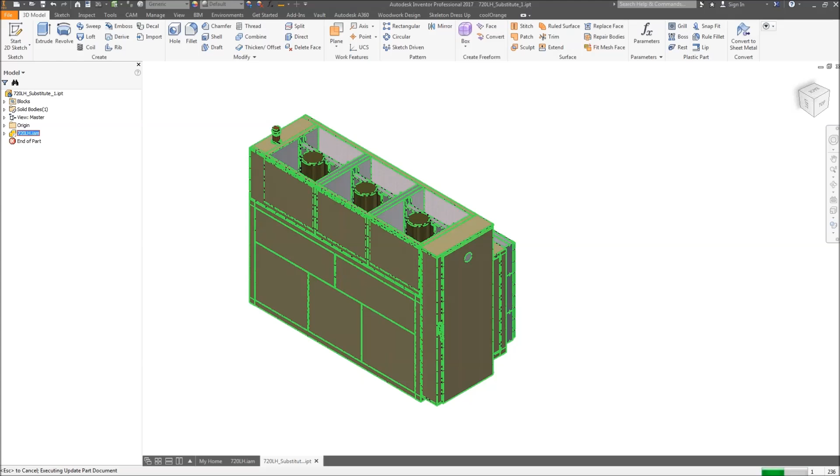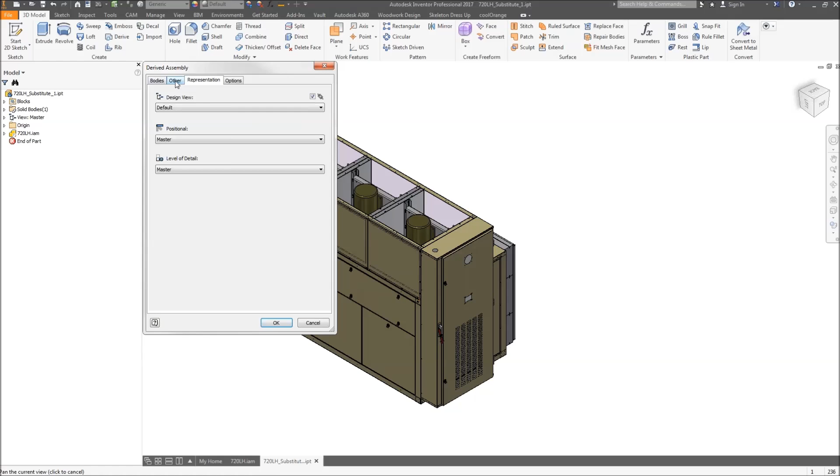Here we go. It was just running an update there, so again it understood there's been some changes and it's updated the substitute. So you can see here we have the full reference loaded back in again. We've got all those details we saw before. If I click to my Representation tab, here are those same settings we saw last time. Okay, so we can go back and change any of these settings from our derived assembly. We can choose a specific representation if there's one we want to peg this to, a visibility representation or positional rep. We can also choose specifically which components we would like to include or not include.

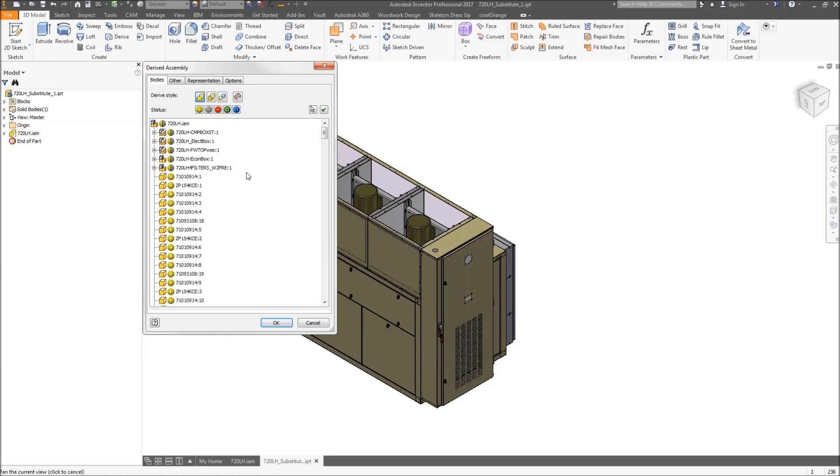So this is quite useful, just being able to eliminate components entirely. So our algorithm did this for us, but we can come in here and pick and choose and say we'd like to have a component shown or not shown. So this gives us a really fine level of detail on exactly what to include. And the other thing that's quite helpful in here is we can also take a look at some of these bodies, and we can replace a body with a bounding box. So if I keep clicking through till I get this green box, it's going to replace that body with a bounding box there that represents the extents of that component, rather than having to manually create bounding boxes later.

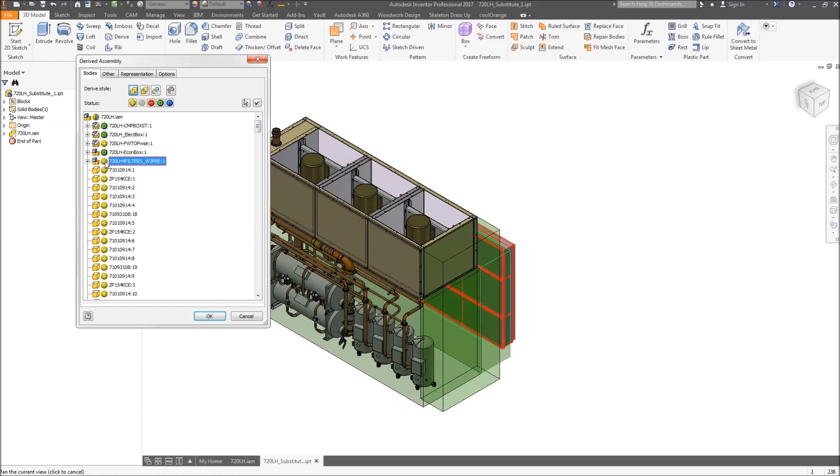So I'm going to leave this one, I think, for us to look at next time. And I think I'll switch some of these background ones to bounding boxes. And we'll see how that has, again, really simplified this model right down to produce something that's going to give an item that's the correct size, but we're not going to worry about it being exactly detailed like a manufacturing model is. Okay, so again, we've removed information, so that's going to be really helpful.

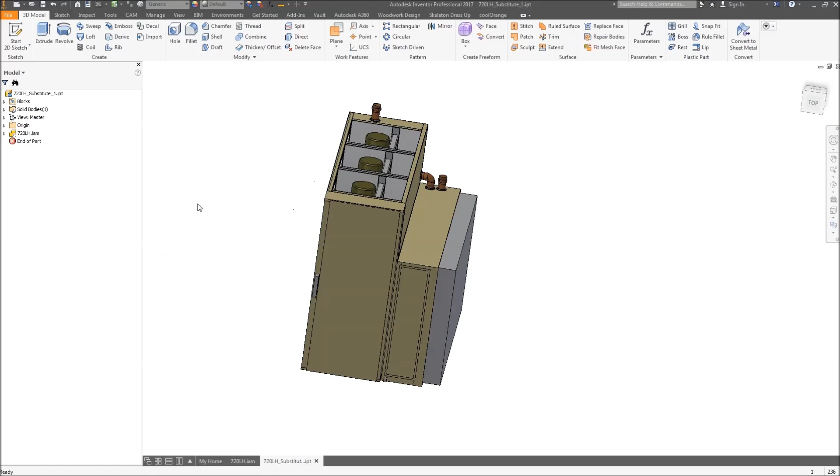Now, in part files, we have some specific tools for simplifying stuff for BIM. So if I direct you up here to our BIM tab, on our BIM tab we have a couple of things. I'm going to talk through the simplify tools first. So the Remove Details tool. Now, Revit, as we discussed, needs a very, very simple 3D model. It's really kind of a placeholder for the data. The data is more important. It's a building information model. Okay, so it's not a manufacturing model. We're never going to take a Revit component and build it exactly. So traditionally, just the same way architects would usually draw to maybe a 1 to 5 is really the smallest or the most accurate level of detail they're going to draw to.

Our Revit models are kind of detailed to about that level. So Revit doesn't have tools for doing complex features like fillets and chamfers, and it can't do lofts. So we can do some really complex surfaces in Inventor that Revit just can't match, but it doesn't need it. That's not what it's designed for.

So this tool here allows us to remove, and if I hover my mouse over here, you'll see it allows us to remove things like fillets and things like chamfers. So we just run that as an algorithm across our whole model. Now I tested this earlier, it took a little bit too long to run, so I'm not going to do the whole lot, but let me just find one and grab it for you.

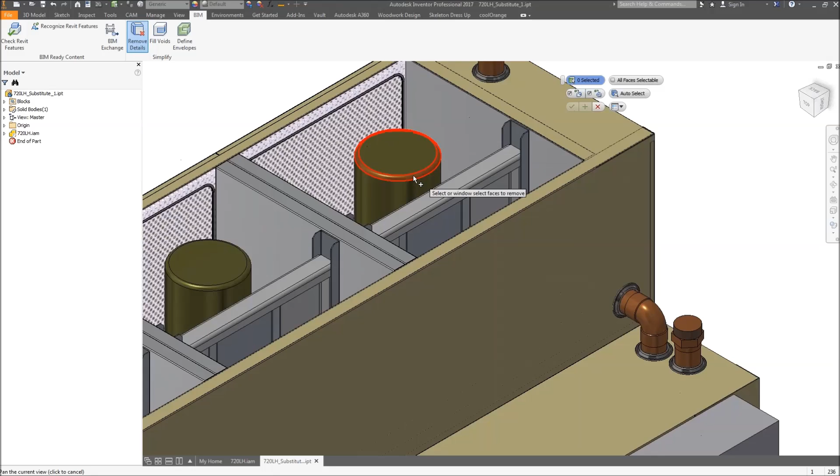So I'll grab this fillet, and what I'll do is I'll say remove that fillet. And what happens is that Inventor just removes that face and it just trims it back. So we're just making something that's a little bit simplified. If we turn on all faces selectable, then really we can select any face and trim it back.

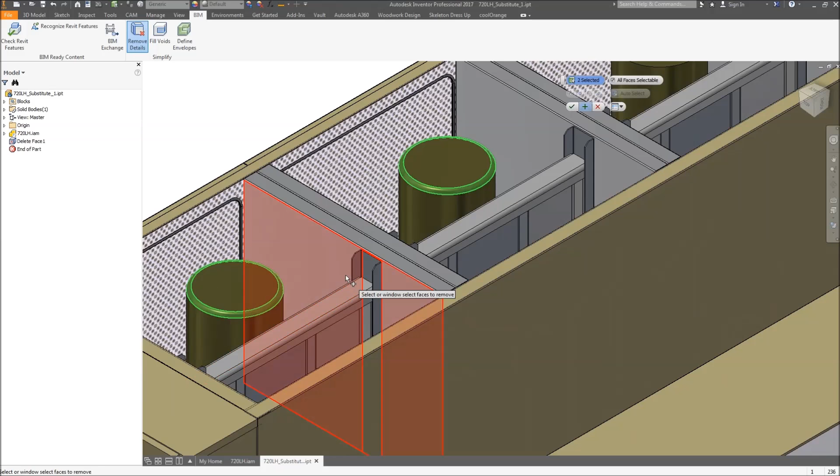So I could, again, I'll select these fillets, but maybe I could select a couple of chamfers in there as well, and then just say, yep, go for that, and we'll see again how these are trimmed back and replaced. Now again, Inventor will try and find these fillets and remove them for you as part of that algorithm.

So if we update our main assembly, it should trickle all the way through. You know how Inventor works. If we remove those features and they're not available, it'll probably throw an error. So we just need to be a little bit careful at this point.

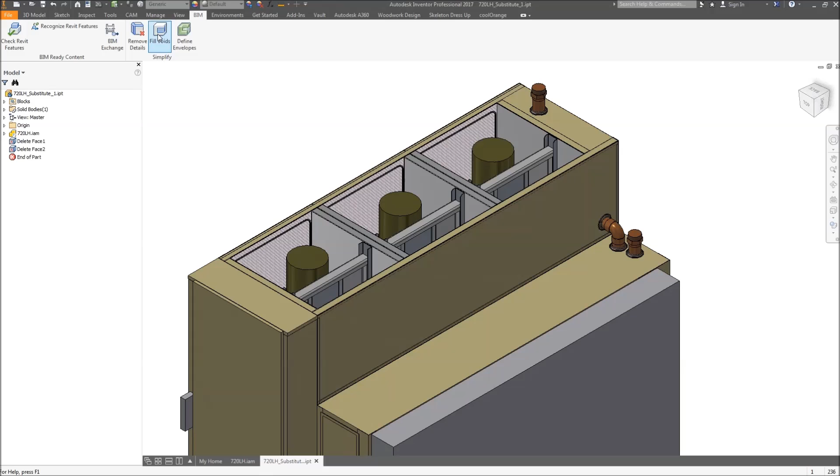We can also fill voids. So fill voids allows us to take any features which we haven't already cleaned up with our algorithm, and we could then fill those in as voids. I don't have a great candidate here because, let's just try that. See, wow, look at that. Let's see if that will give us that void.

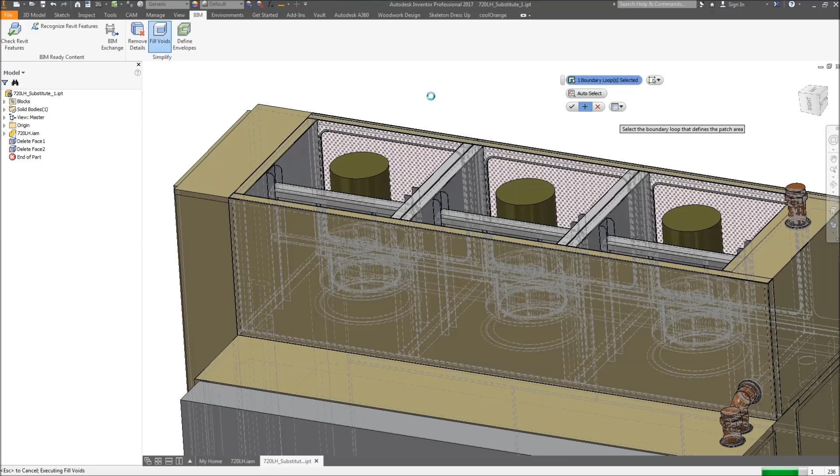So if we didn't hit anything with our patch holes tool, the fill voids tool would allow us to come in there and try and patch in any additional voids which we didn't hit before. Okay, not going to let me do that one, but you see what I mean. You see what we're going to do there. So we could patch that in individually, and we can also define envelopes.

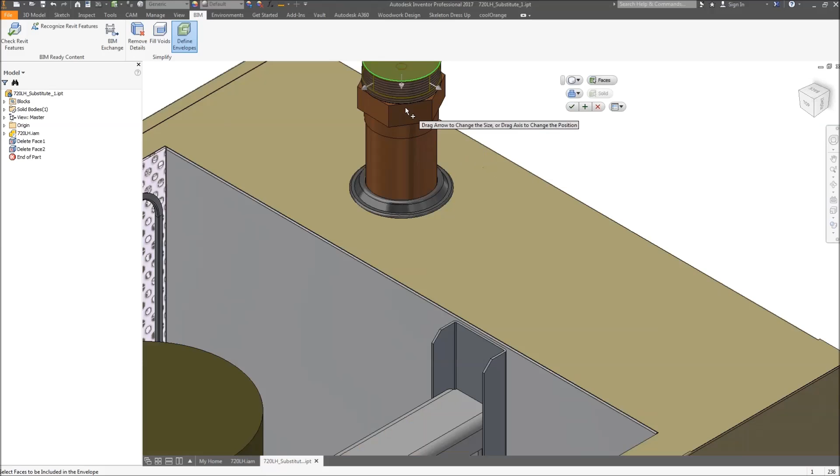So define envelopes allows us to create square bounding boxes or cylindrical bounding boxes. We pick a face. If I pick resize there, you should see it allows me to just drag out a shape. And if I make sure I pick a line, I could align with the bottom of the shape, align with the top of the shape, and then maybe just drag that out in terms of size a little bit.

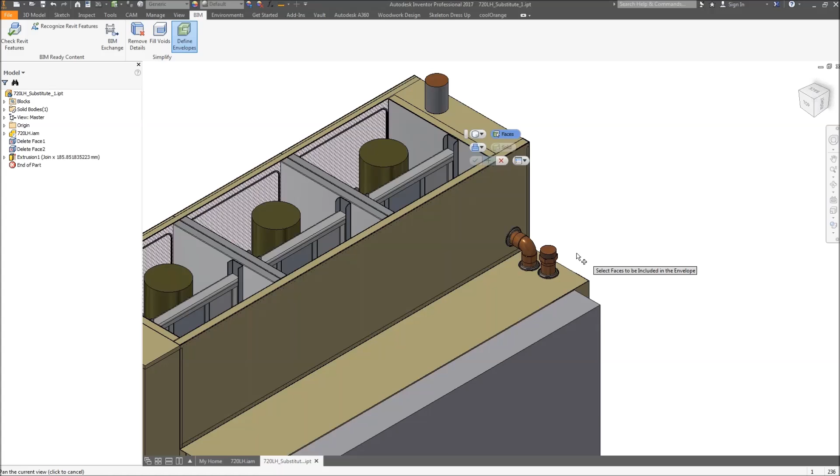And you see again how it allows me to replace something that's quite complex with something that's a lot simpler. And again, this is all about producing something which has the correct detail in there, but it perhaps doesn't need to be as accurate as we would have it in real life.

Now, we also have this tool here called Check Revit Features. So what this allows us to do is it allows us to say, could Revit have built this? And if we click Check Revit Features and it returns a result that says yes, Revit could have built this, then we'll be able to export it as a Revit file. Now if we hit Check Revit Features and it says no, this is too complex, you can never build this in Revit, it wouldn't let us create a Revit file for this item.

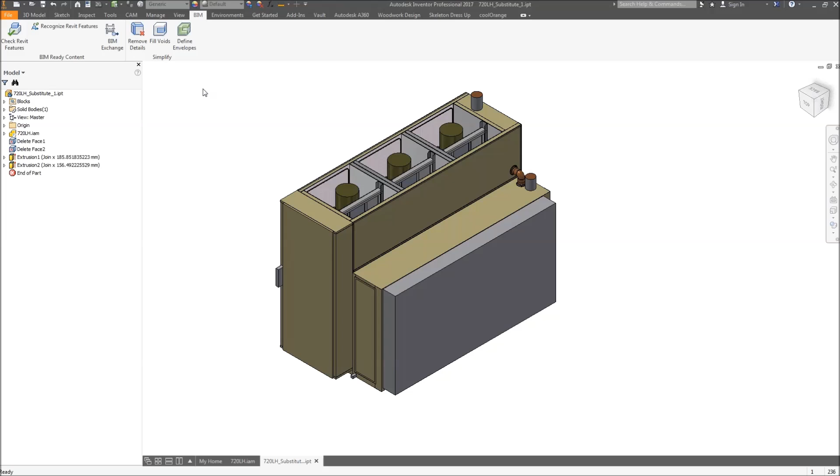Now I'm not going to go through that today because plainly it would take us a little while to clean this model up to export out to Revit. It's a good tool for things like individual parts, but for bigger settings like this, I think we're probably going to use these more algorithmic tools where we can run through automatically.

Anyway, so we clean this up a bit more. Let's move back to our Environments tab. So I'm back here in the assembly. I'm going to click again on my BIM Exchange tab. Let's take one more look at Check Design.

So we've managed to again reduce the complexity and the number of faces, and made something a little bit simpler that we can export out to Revit. The longer you spend on this, the more you can get it reduced down, and the simpler you can make it, the happier the recipient will be.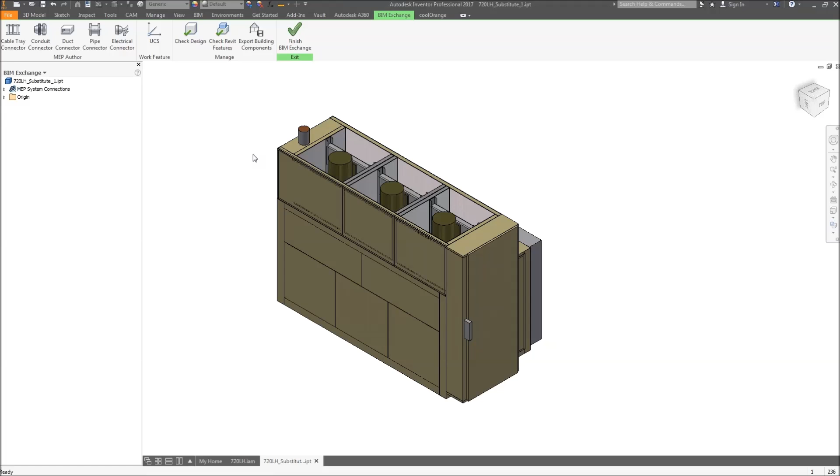Let me click on Export Building Components and drag across this from the screen. For the file format, choose the Revit family format. I'm not going to choose Revit family today, as I explained that would take a bit more setting up, so I'm going to do an ADSK file instead. We can choose our origin.

Component type classification is our category. If I click here, this is where we find our product. So if I typed in air and did a search, I could look for our air handling unit. What's important is you can see which Omniclass node refers to which Revit category. So if your customer gives you a category, say they want it to appear in the doors category, any of these nodes are absolutely fine.

If you've got a specifically airtight door, you can pick doors, it's all good. This information will be helpful, it's in the right category, we're fine. If you're not sure, go up to a higher level node, because you're still going to be collected when they do a table of all the doors, you're still in the right category. So if you're ever worried, just go up and pick a higher category if you can't find your specific one.

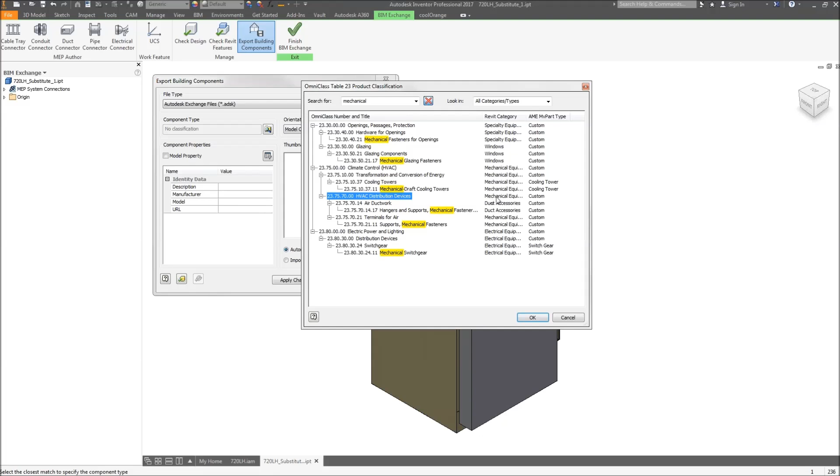And if you're worried about it, talk to the BIM coordinator and see if there's a specific Omniclass number that they could help you find. So I'm going to look for mechanical equipment, do a little search for mechanical, and let's go for HVAC distribution devices, mechanical equipment. Yeah, that would be great, so I'll pick that as my category.

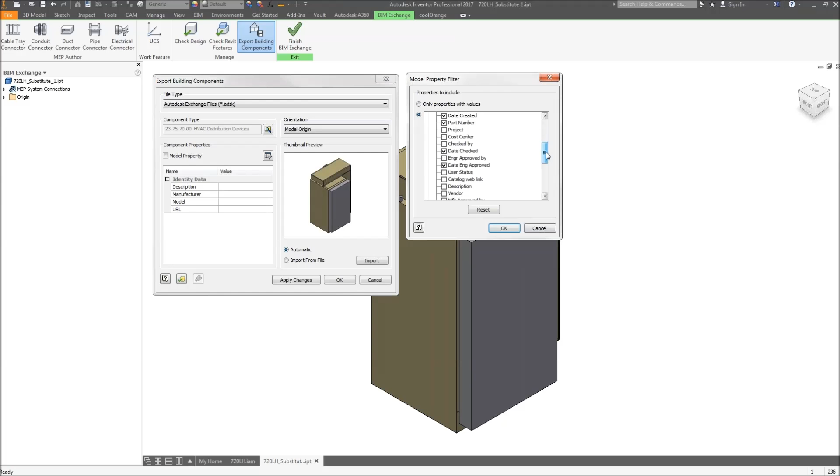Finally, model properties. I'm going to pick on the filter here, and you can see we can include model properties from our Inventor model. These are the properties we've got in the assembly, and we can choose specifically which properties we'd like to extract, and also whether we want to extract any custom properties.

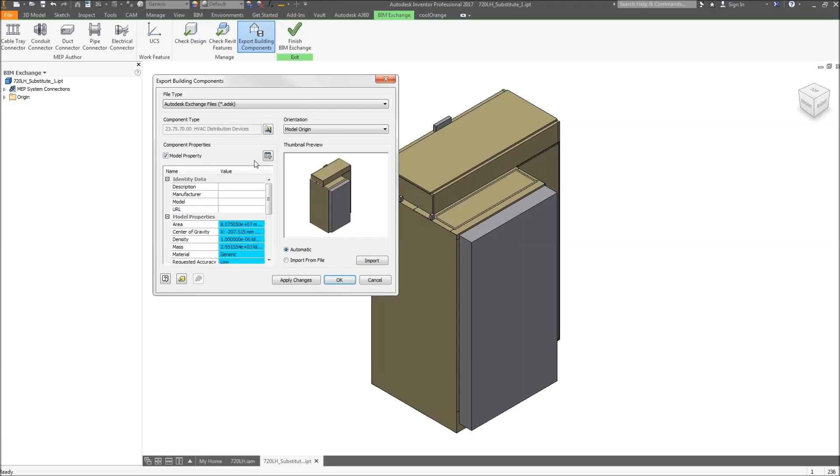If I just tick model properties here, you can see all the model properties that would usually come out of there. If there's specific information like our COBie data that we've been asked to produce, we'll need to put that into the assembly as custom properties, and make sure they're extracted when we do our exchange file. When we're all done, I'll pick OK, and this allows us to export our ADSK file, our interchange file format. So I'm going to click Save.

So this is now publishing the 3D model out. It'll give us a report when it's finished and tell us how it got on. And what we'll do finally is open up that ADSK file in Revit, and just see how that worked for us.

So we're nearly there.

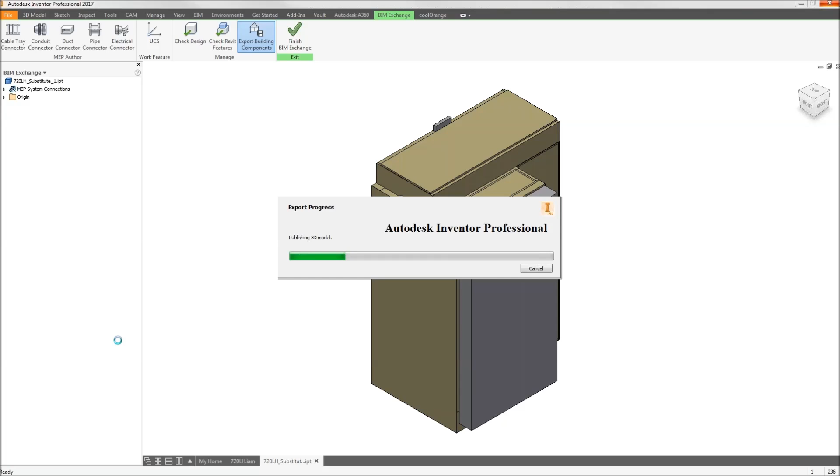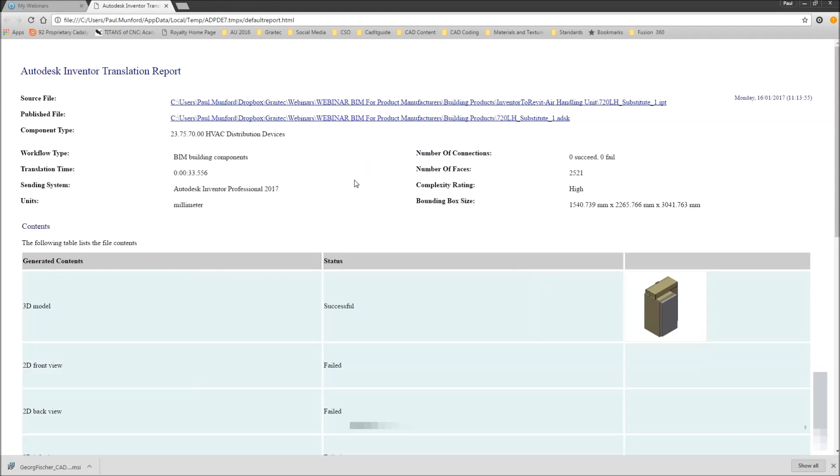So I'll view the translation report. It tells us how it's translated, saying no front view or back view because there was no 2D data in my model - it's an Inventor model, so it's all 3D data. But it gives us a bunch of information we can use to see what information was extracted and how successful it was. So let me switch us over and grab Revit from my other screen.

Just bear with me a second. Here we go. So I'm grabbing Revit here. What I'm going to do is choose Open, and I'm going to browse out and find my exchange file there.

Let's go back to Inventor and double check what I actually exported out as in the end. Straight into the building products. Okay, here we go.

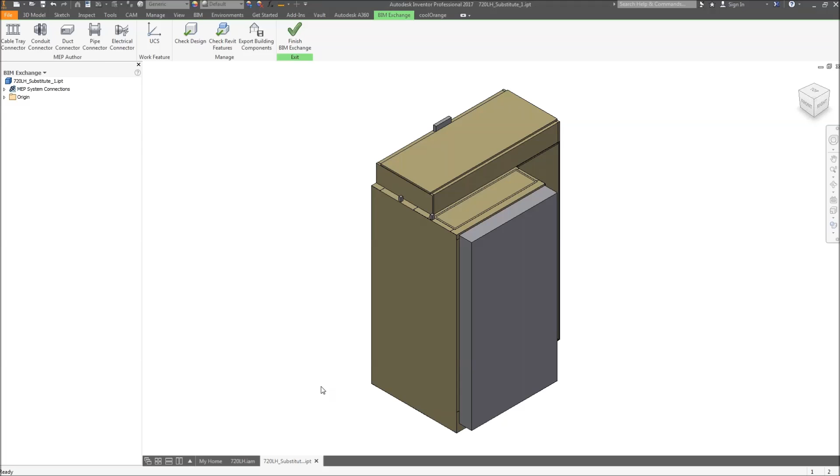There we go, there it is. So I'm now going to open this up, and what Revit will do is open up a new Revit family, and that family will be based on the category we chose. So that tells Revit which family template to use, and then it's importing that data.

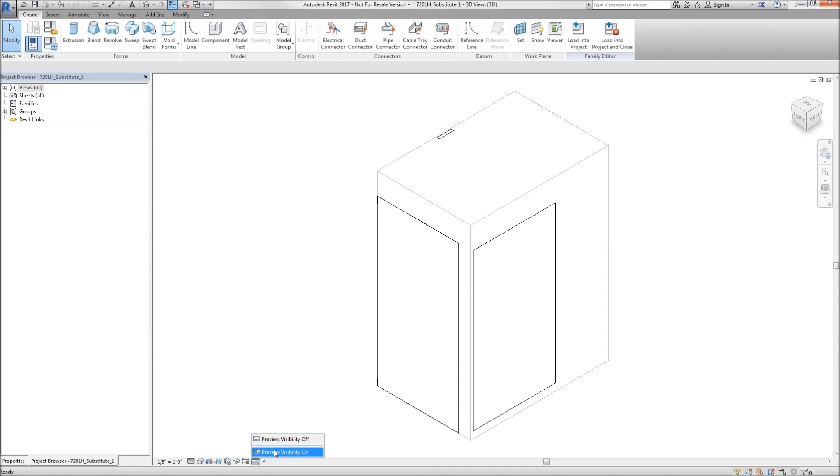Importing that data into Revit from Inventor. So here we go, that's imported now. If I come up to my categories browser, I can see my category is mechanical equipment, and as I scroll down we should see the Omniclass number we picked, HVAC distribution devices. If I just turn on my preview visibility, we get a preview of what this would look like, with realistic colours.

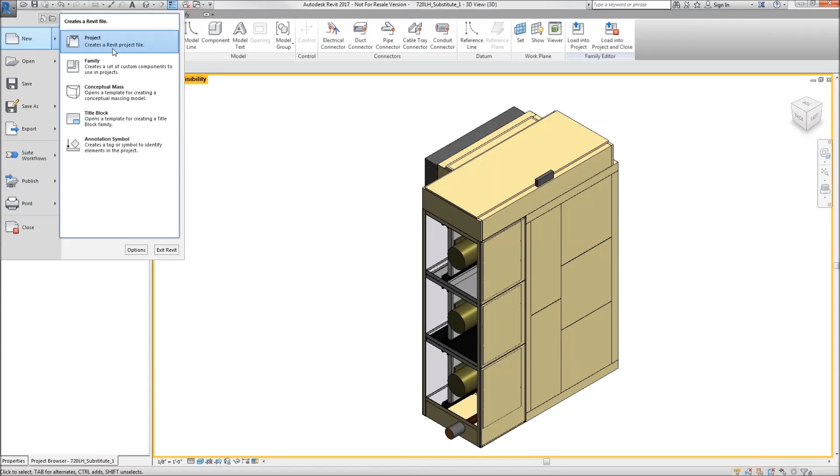So that's how this is going to look in the model. The last thing I'll do is create a new Revit project using the architectural template. I'll just jump back to my ADSK file, and choose Load into Project.

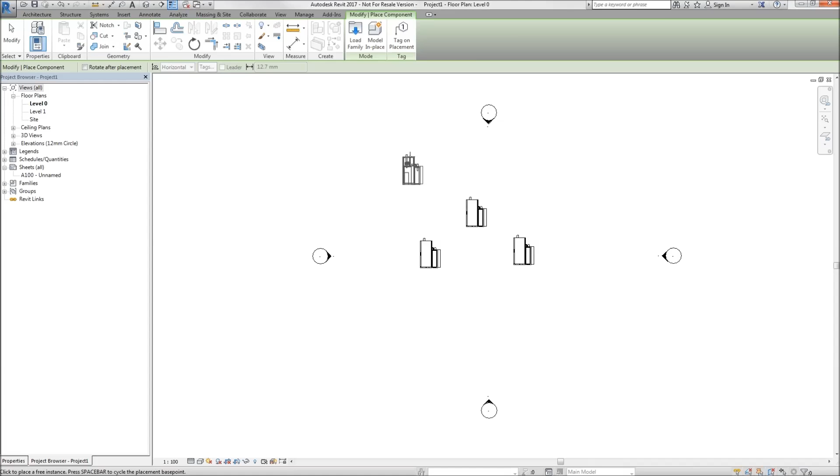And then once we're in the project, we can start placing copies of this component. So we'd come across to our schedules and quantities, create a new schedule of quantities, choose mechanical equipment, choose OK, and bring across a couple of these items. Choose OK, and you see it's scheduled out the number of items we just placed into the project. So that's the workflow right way through from start to finish.

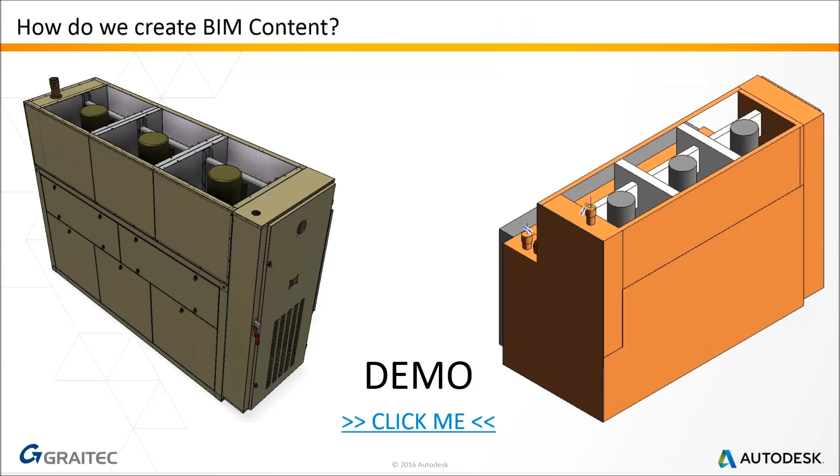So I'm going to jump back to the PowerPoint now. I'm happy to do a Q&A. Let me just take a look. Has anybody raised any questions while we're talking? No questions have come through yet, so if you've got any questions, put them in the questions box or the chat box and I'll take a look. But I have prepared some questions because sometimes it takes a little while for them to come through.

So, first question: do I need Revit to create BIM content? Who knows the answer to that one? I hope you'll all be saying, no, I don't need Revit, but I might need it for checking file translation. So if you've got Inventor and you're intending to participate in a BIM project...

I hope I've shown you how you can extract data out of Inventor and include it in BIM. But you might want to be able to open up that ADSK file or Revit file in Revit just to see what you've got and check it. So Revit LT might be a good choice for you—you can just open it up.

If you're doing heating, ventilation, air conditioning systems, you can actually produce Inventor components that have all the correct piping to be able to include them in your MEP model. But what I would say is you do need full Revit to be able to check those. So you're talking about a slightly different product there.

Can I buy Inventor and Revit as a package? You can't currently buy Revit and Inventor as a package. If you've got a product design suite or a building design suite, keep it, because Autodesk are no longer doing those suites.